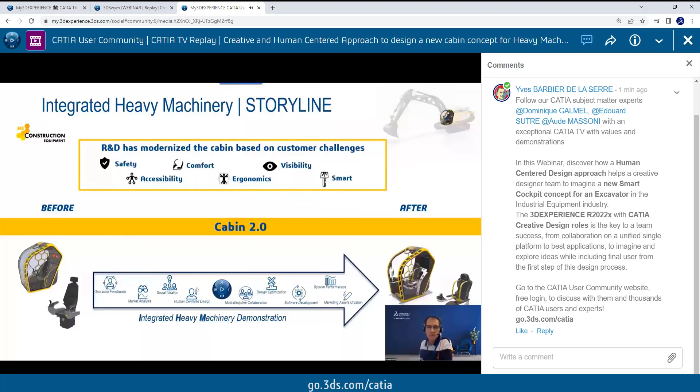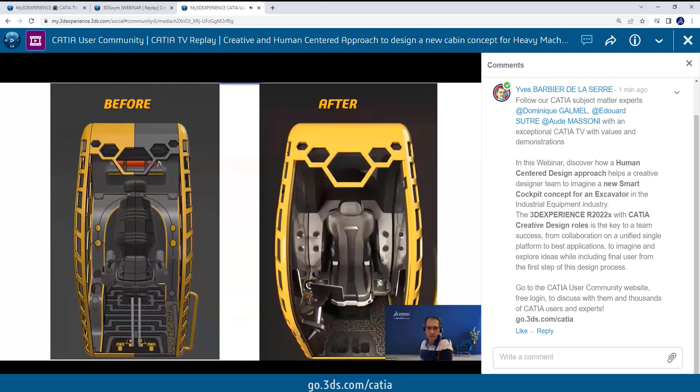As we mentioned, we've started from this existing one up to this new result on the right side that you can see, quite an excellent result that will be described and demonstrated later on by Edouard and Aude.

And this has involved many teams - in fact, 4 teams in our company, 15 people working in collaboration on the same environment, leveraging our capability of the 3D Experience platform. Of course, from the CATIA team for the design, and color and trim; for the simulation organization, simulating the comfort and the HVAC systems, delivering marketing assets, as well as driving the project - the industrial equipment industry - to manage this overall collaboration and challenge.

The scenario that we have gone through really starts from socialization and innovation management, with market analysis, some kind of survey on the global market with operator feedback, collaboration, social collaboration inside the 3D Experience platform with 3DSwym communities, exchanging on concepts, and then brainstorming sessions to validate the new ideas and start initiating the project based on this informal exchange that key stakeholders may have within this social collaboration concept.

Afterwards, there has been this creative design, human-centered design, that will be the center of the CATIA talk today, described by Edouard and Aude in the following part of this session. We also had the capability to do systems performance - HVAC systems performance, cabin performance validation - with this new cabin, for the safety of the operator, but also for its comfort and to respect the regulations.

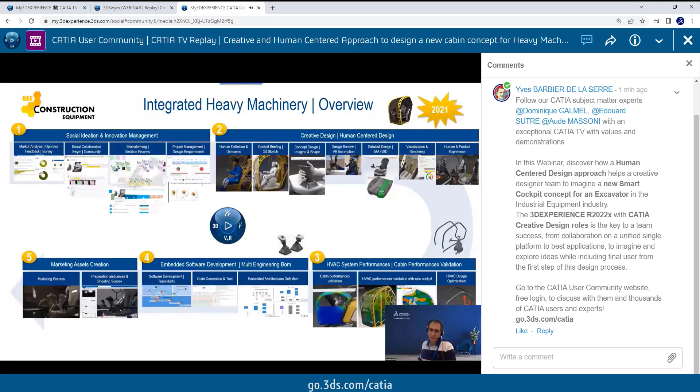Now it's time to move ahead with the second part of the session, creative and human-centered design. Edouard, Aude, this is your turn.

Okay, so now it's time to go to the demonstration. With Aude and the team, we worked last year on a new design project. The idea was to do the interior design of the cockpit for the BEE excavator. And now we want to comment all the videos to illustrate all the capabilities of CATIA applications available in our portfolio.

And also what we call the human-centered design approach, the new trend we want to push on the market. During this presentation, we will go through different phases. The first one is about ideation and also how designers will explore ideas. Then we will talk about how to experience your concept, how to visualize it, and we will finish to talk about virtual validation of this concept.

So here is the full workflow. You see there is 10 different milestones. And first, we will talk about the project kickoff and brainstorming with Edouard.

Yeah, so we used 3D Whiteboard to start our new creative design project. 3D Whiteboard is a new capability offered in the 3D Experience platform for everyone. All collaborators are able to create whiteboards and collaborate with them. And here you can see we were able to brainstorm to gather some documents, some images, pictures from PDF, in order to start the new ideation process for this new cockpit, new cabin.

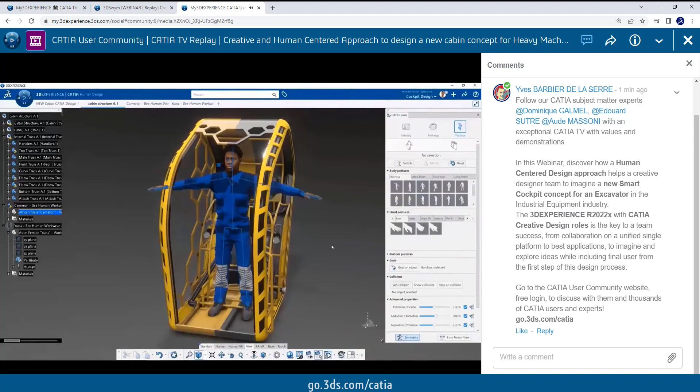Yes. So this was the first initial step. Then we will enter to the human definition and use cases. For that, we will use CATIA Human Design application. And here, the human factors specialist was using the application to position a new human reference in the cabin, really at the beginning of the project.

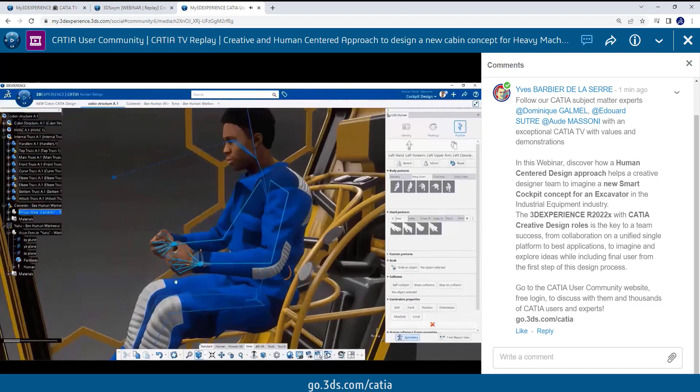The idea was to model and to create the geometry around the human. So here you can see we are able to manipulate and to create different postures for this virtual human using an inverse kinematic engine. It's really easy to use. All the designers can have access also to this human. You will see that in the next steps.

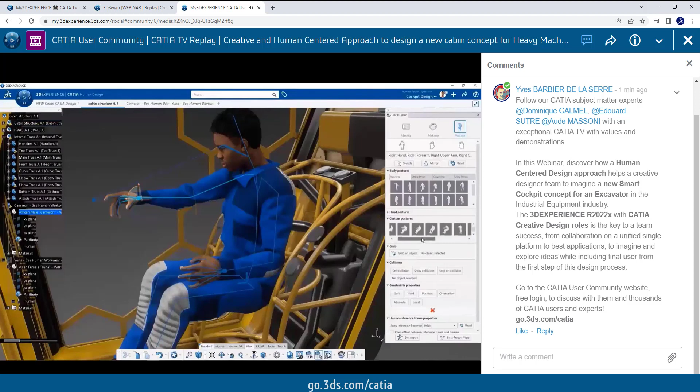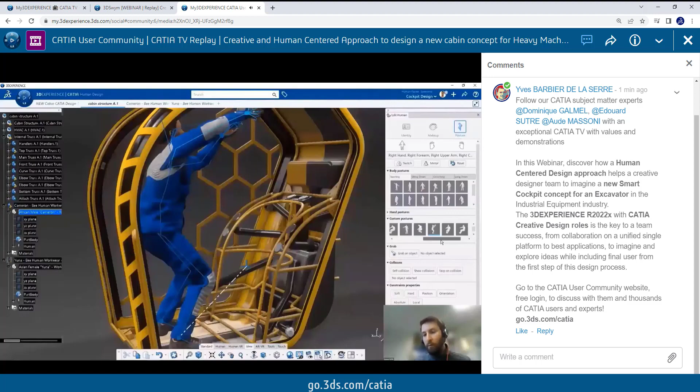And also the human factor specialist for this project had created different postures. All the postures are representing a specific use case we have to address as a designer. So for example, the future user will have to enter to the cabin, but also to access some elements, some safety elements, or also able to put some objects in the cabin, and of course drive the machine.

Okay, so now let's see how all this human preparation and also how the human-centric approach will help the designers in their everyday life project. So we will talk about the concept design phase.

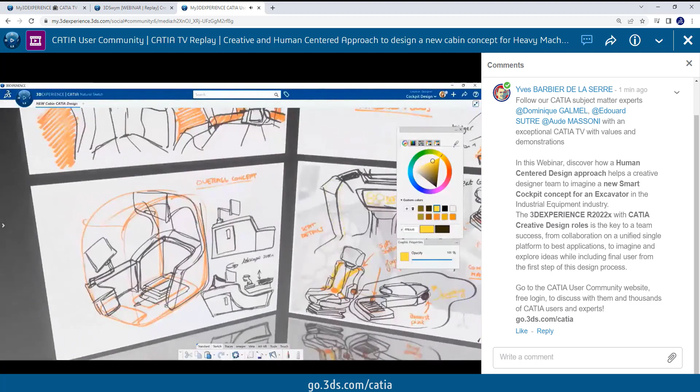So now the designer, he prepares everything in the 3DEXPERIENCE scene. So there is some image that he created, imported. Of course, there is the shape of the external cabin. And you see there is also the human that is already here and can be used as a reference to design around and to shape first ideas.

So here it's an application called CATIA Natural Sketch, which is in fact a 3D sketching application. So you can, of course, sketch on a plane, but because you can change the drawing plane position in space, it's then possible to create complete 3D sketches.

So here I position a plane and I start to draw some rough shapes. It's just pixels. You can choose some colors through a color palette and easily change the brush size and opacity. Here I choose to go in the side view to start to draw the profile of the seat, still in context of the human.

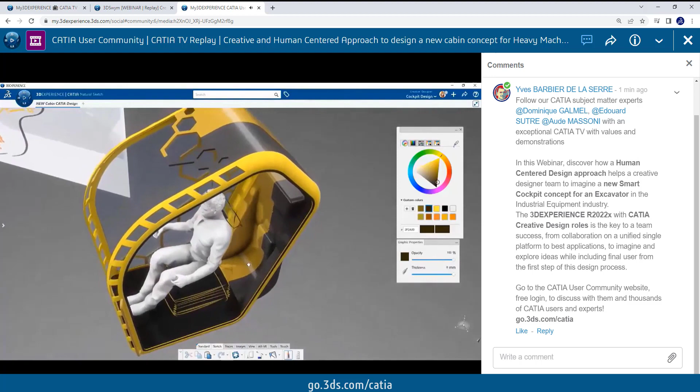It's a very interesting way of working for designers because you don't have to think about the scale and the proportions. It's quite natural today because you are always in reference of the human body and proportions. So of course it's easier to position, for example, the armrest and the base of the seat.

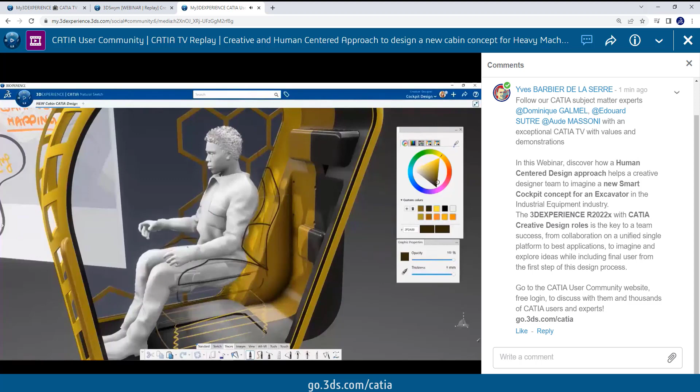Here I switch to another tool, which is the curve creation tool. You can see that there is some snapping to have an easier way to create the curve networks. They are always connected all together. You can change the colors to specify different parts of the seat.

For example, the armrest here in brown. It's easier to read at the end, the 3D sketching. As you can see, it's very easy also to only double click on the human to change its posture for specific needs.